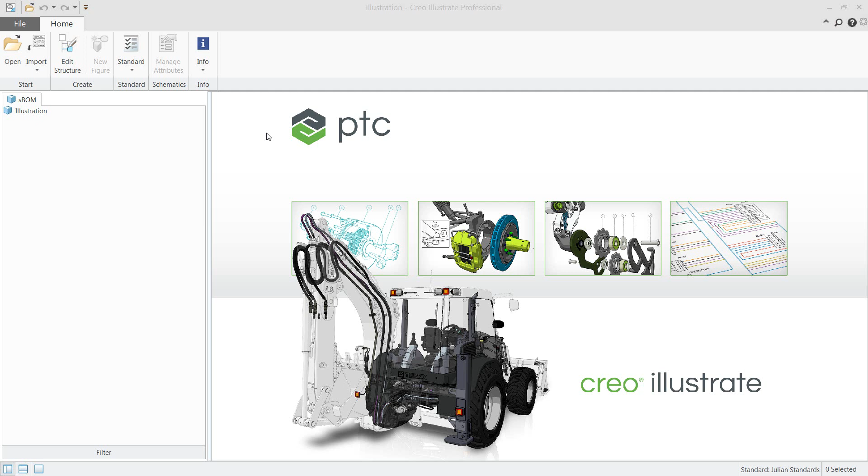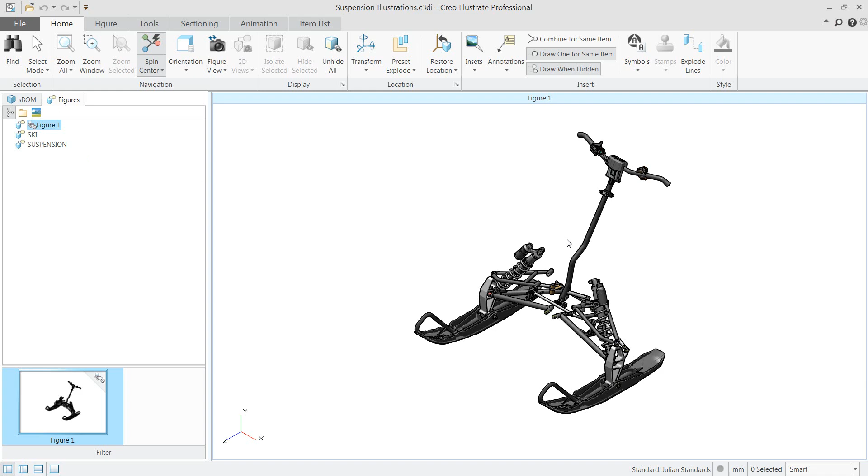With PTC's Creo Illustrate, a technical illustrator has the ability to connect directly to Windchill Service Information Manager to create, edit, and modify CAD-driven illustrations. These illustrations have a link back to the CAD source data to allow for illustration updates in which we can represent the most accurate and up-to-date CAD geometry.

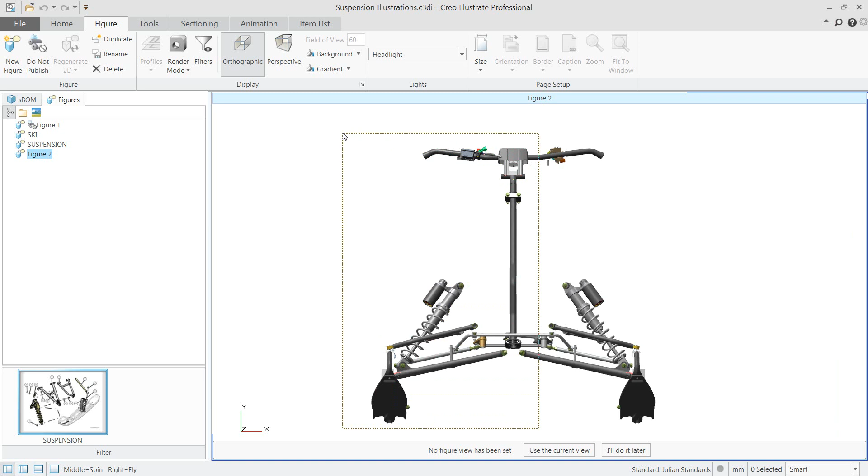In this case, as an illustrator, I've opened up an existing illustration. Here you can see we have a couple illustrations that have already been created. They have been created in a 3D environment and can be published to 3D or even 2D. Let's go ahead and create a new illustration. Within Creo Illustrate, I can create as many different types of illustrations as I want in one single file, whether they will be published to 2D or interactive 3D.

As an illustrator, I can select on geometry very quickly and easily and hide that geometry to pinpoint exactly the parts that I want to illustrate.

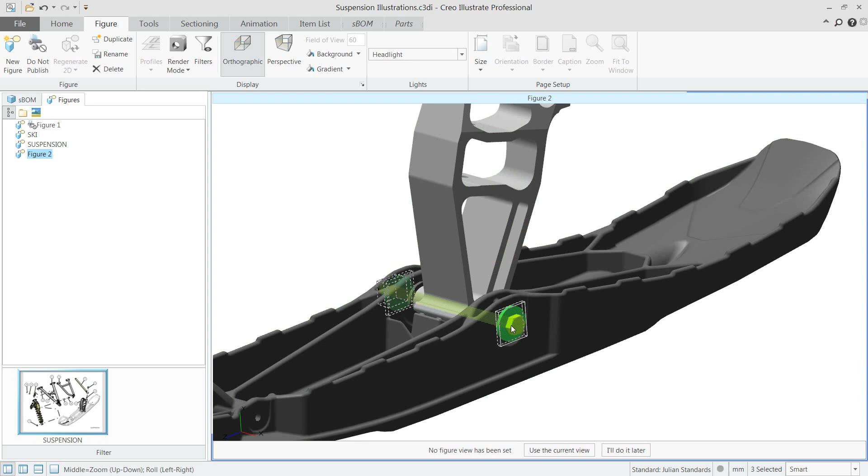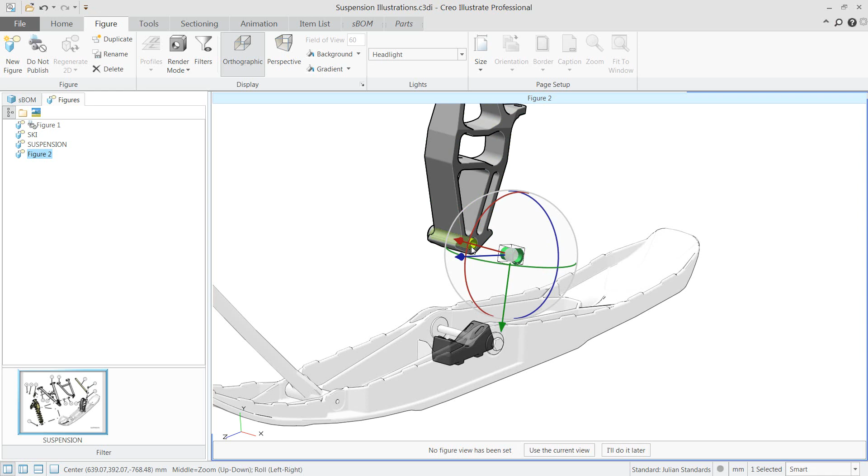In Creo Illustrate, we have a variety of ways in which we can modify the appearance of parts, whether making those parts phantom or transparent to be able to see through them, as well as selecting on components and modifying their position or placement using a transform tool. You can see just by selecting on parts and using the transform tool, we can easily drag and reposition components to create an overall explode state.

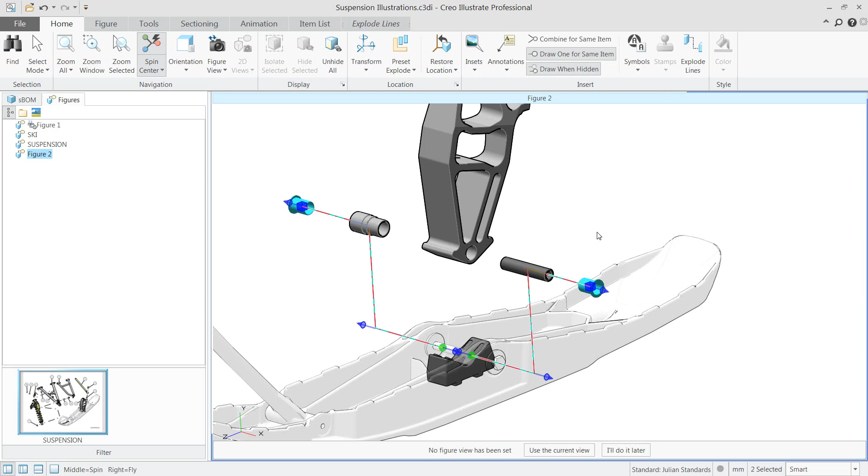Once we've created our explode state, we have the ability to create dynamic explode lines. Selecting on a part, using the explode line tool will create an explode line back to the original source location of the part. I have full control over these explode lines and an easy way to go in and edit and manipulate and change the overall path and the final placement or location of the explode line.

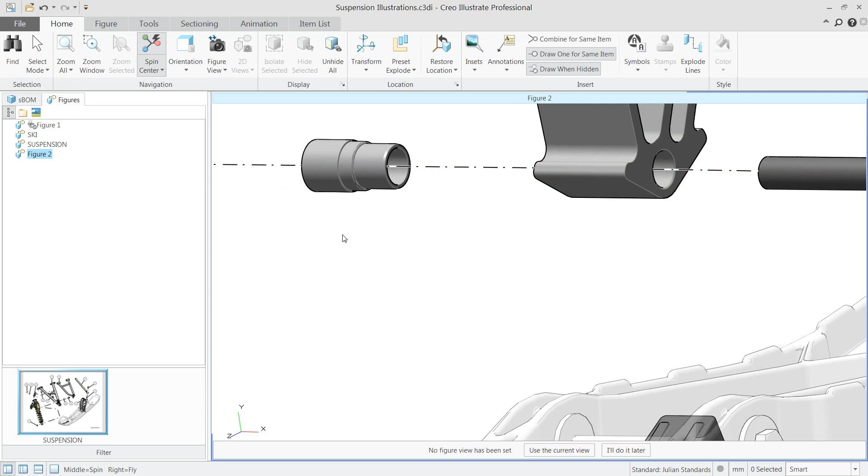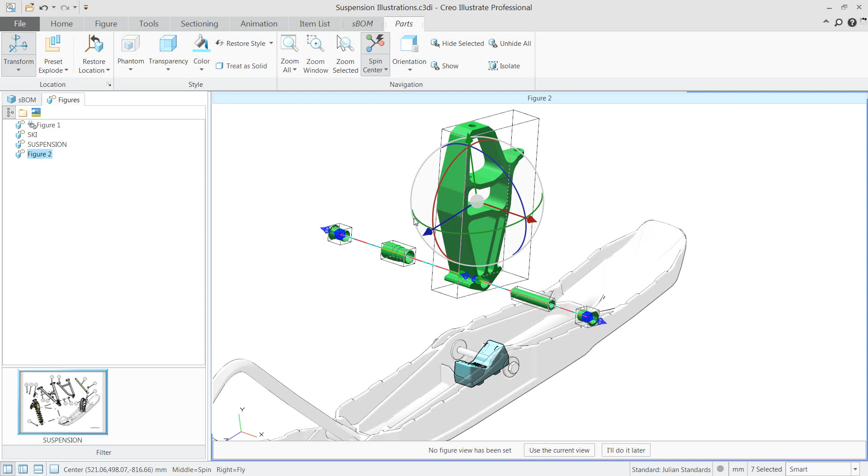Within Creo Illustrate, I also have the ability to interact on parts and modify the color or appearance of those components. Don't like the color that the engineer assigned during the design process, or want to represent the parts differently in the illustration? I can easily select on those components and change the overall color.

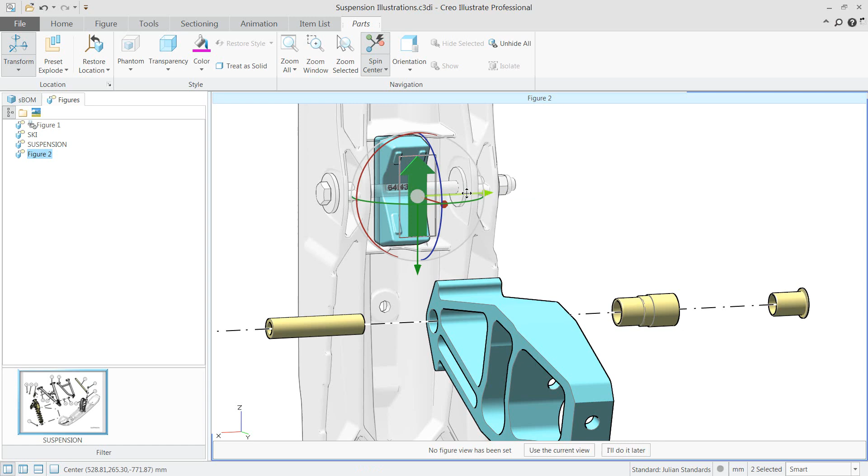In this case, we want to add a detailed view, or what we call an inset, to our illustration. I have the ability to also insert library components. Creo Illustrate comes with an out-of-the-box library with standard arrows and other tools and objects to use and leverage within the illustration process. The library is very configurable.

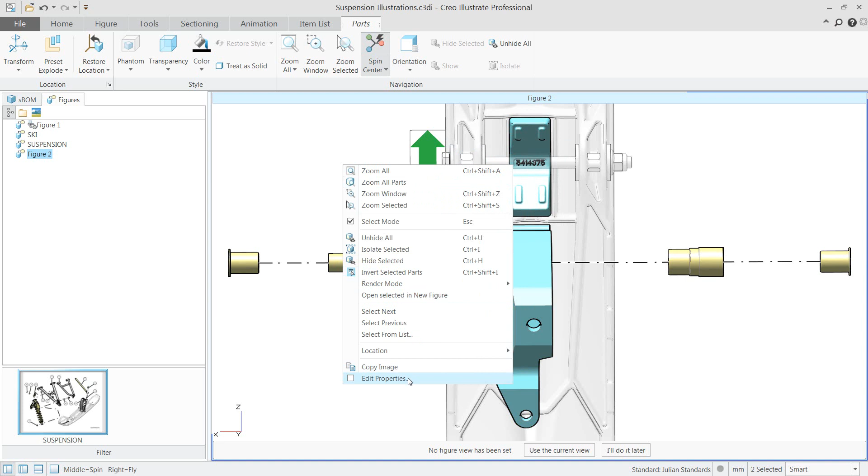You can create your own tools and components to store off in the Creo Illustrate library and use at your disposal. In this case, we've inserted an arrow and we're changing some properties about this arrow. I have the ability to modify the color of the library component, the scale factor, change the size of it, and so forth, as well as even the position of the arrow in the graphics area.

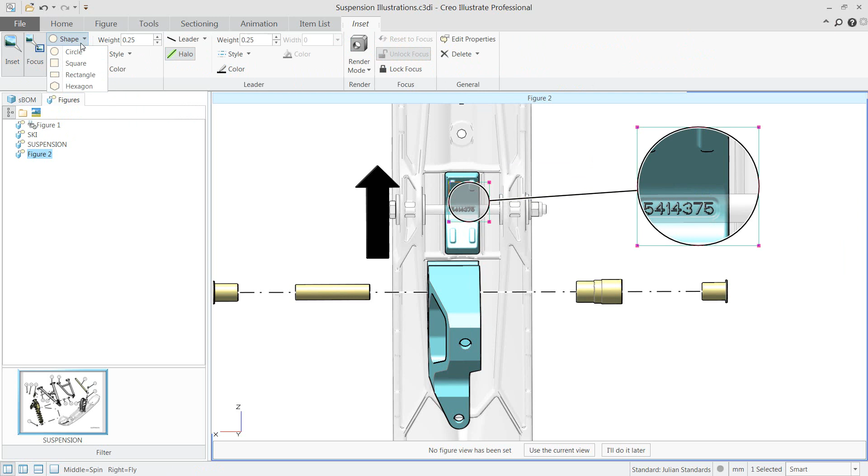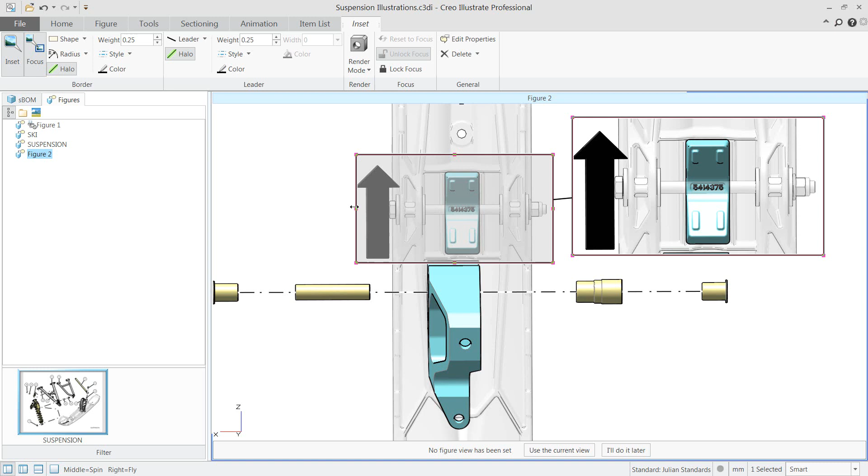To finalize our detailed view, we will go ahead and insert what we call an inset. With the inset tool, an illustrator can define a focal point and project that to a detailed view window. In this case, I'm going to modify the inset to ensure that everything fits properly within my detailed view, and indicate to the end user the correct direction to install the spindle seat component.

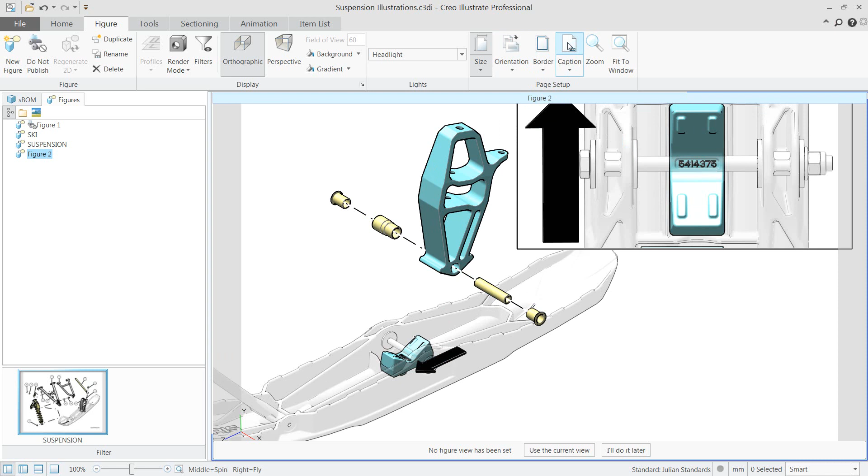We also have the ability within Creo Illustrate to not only create and publish out 3D illustrations, but also publish 2D illustrations, whether those are in a standard raster or vectorized format. I can indicate or create a page size and position and place my 3D information on that appropriate page size before publishing. I also have the ability to insert callouts.

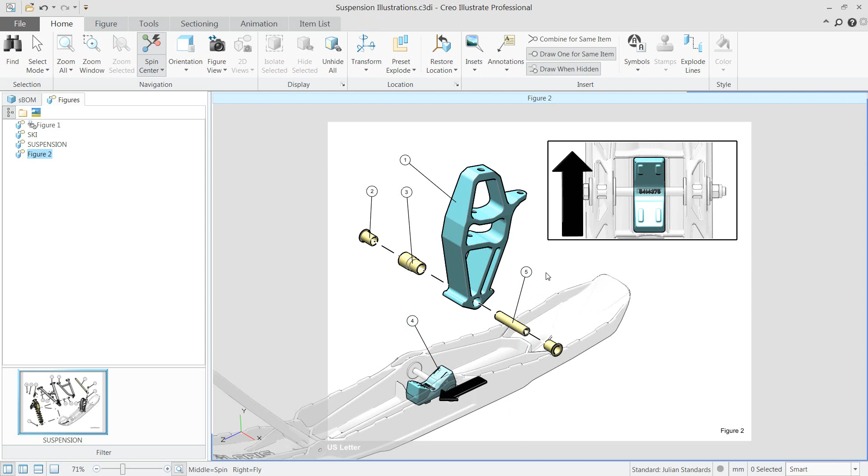Creo Illustrate has a standard callout tool that is very configurable, and you can set up your own callout styles. We will use a standard out-of-the-box callout style for item number. I have the ability to interact directly on the callouts, reposition, and change properties and information about those callouts. Every callout we create in Creo Illustrate is a hotspot by default, so if I select on the callout, it will actually select and highlight the parts and components for me.

Once the illustration has been finalized, I want to go ahead now and save this off in Windchill Service Information Manager. Selecting the Save button allows me to do that and create a version and iteration controlled illustration.

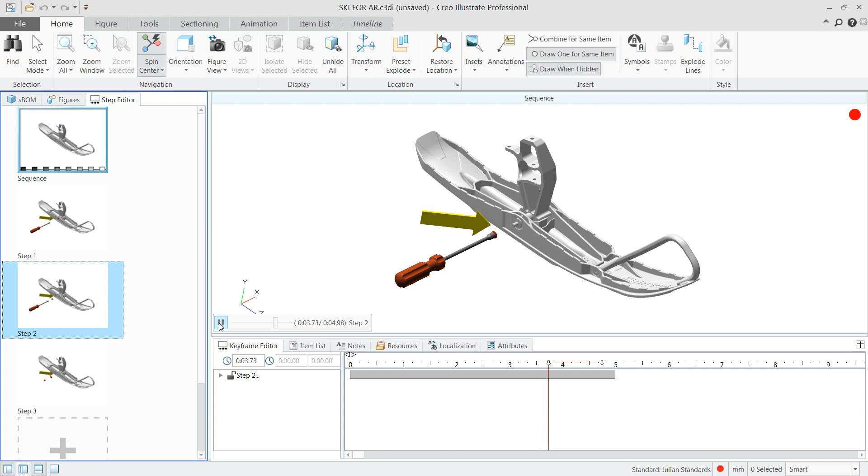In this next example, we want to use Creo Illustrate to create a technical 3D animation. We will be creating what we call a sequenced animation. In Creo Illustrate, you can create a variety of different sequence steps. These steps can be published out to 2D and placed in documentation, and also published to 3D and played as animations. Let's go ahead and finish the last few steps of our sequenced animation.

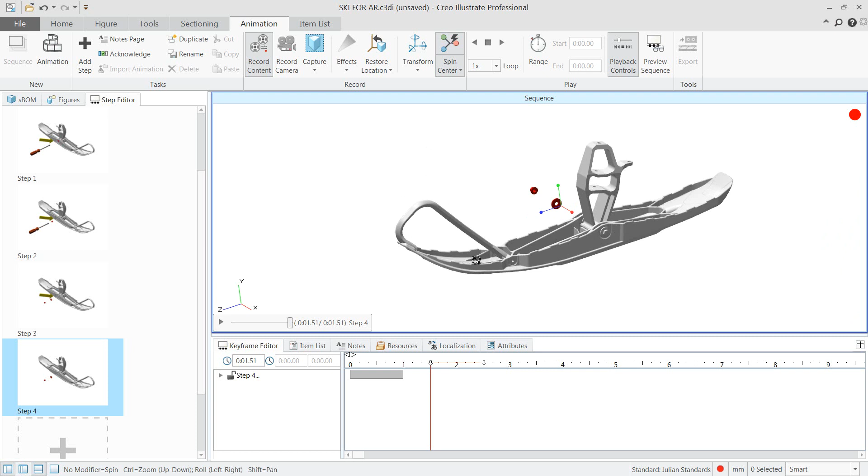By selecting on our animation tab, we have the ability to add a new step. You can see that it adds a step in our step editor tree. As I select and interact on parts in the model as well as library components, I can toggle their visibility, apply effects, as well as change the color.

In this case, we're going to indicate how to remove the hardware and how to take the ski off of the spindle. Selecting on the hardware, I can choose to change the color, apply effects such as unscrew effects, and translate to create overall explode states.

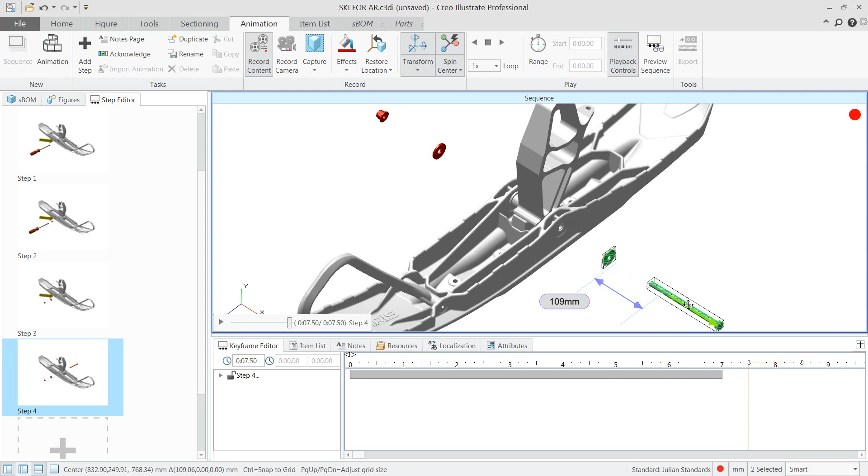Once I've interacted on the actual bolt, let's go ahead and do the same thing for the washer. We can change the color of the washer and go ahead and translate the washer outward.

As we're creating these animation steps, they're very easy to go in and modify and edit. Expanding out the animation tree down at the bottom shows all the tracks in the timeline, and I can click and drag and dynamically move and edit those tracks to modify the overall animation step.

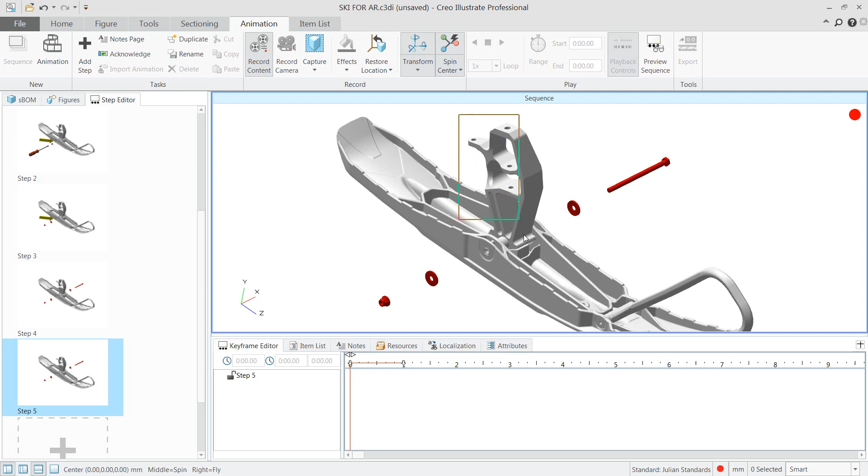Let's go ahead and add one more step. The last step in this process is we're going to actually remove the spindle, remove the ski from the assembly. We'll change maybe the color of the spindle and translate the spindle upward.

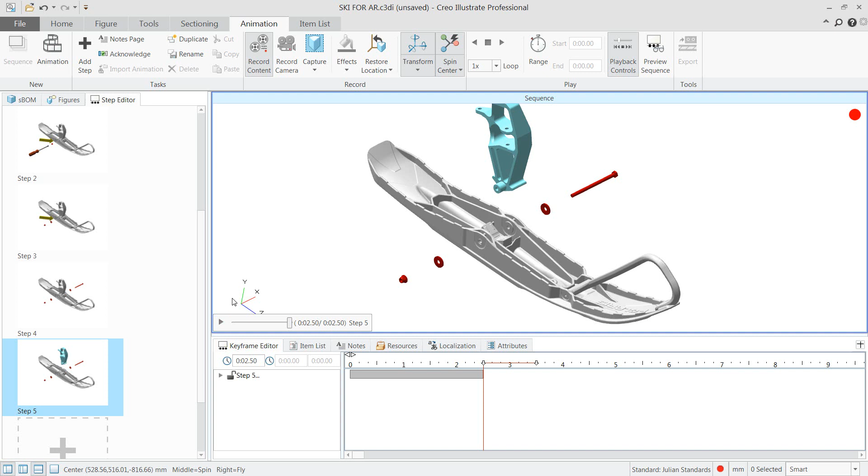Once I've finalized the animation, again, I can publish the animation out to 2D, I can publish it out to interactive 3D, and I can also leverage off of this 3D animation and use it in Vuforia Studio, our technology for creating rich, augmented reality experiences.